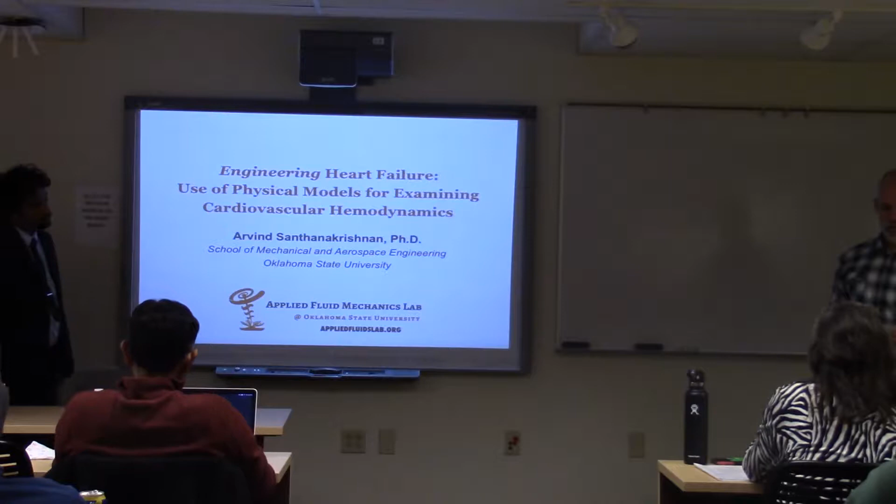So he's an assistant professor in the School of Mechanical and Aerospace Engineering at Oklahoma State University. He received his PhD in 2007 from the Department of Mechanical Engineering at the University of Kentucky. His doctoral research was focused on developing plasma actuators for flow control applications in micro-aerial vehicles.

He worked at the Carolina Center for Interdisciplinary Applied Mathematics at the University of North Carolina, Chapel Hill, as a postdoctoral fellow, investigating fluid structure interaction phenomena occurring in biological systems, including vortex formation in the developing vertebrate embryonic heart.

Following UNC, he pursued research in cardiovascular fluid mechanics at Georgia Tech, biomedical engineering. There, he simultaneously worked as the primary engineer in a collaborative research project between Georgia Tech and Children's Healthcare of Atlanta to design and develop a renal dialysis device for use in infants and children.

And currently, he directs the Applied Fluid Mechanics Lab at Oklahoma State University, conducting research in the areas of heart failure, flying and swimming of tiny insects, crustacean swimming, and pore water pumping by upside-down jellyfish.

So today, I don't think he's going to be talking about jellyfish or insects today, but he's going to focus on cardiovascular health. I'll put a little thing in the front.

Thank you. So I'm really glad that some of you guys showed up, either by choice or because you have to satisfy the seminar hours, but I'm glad you're here.

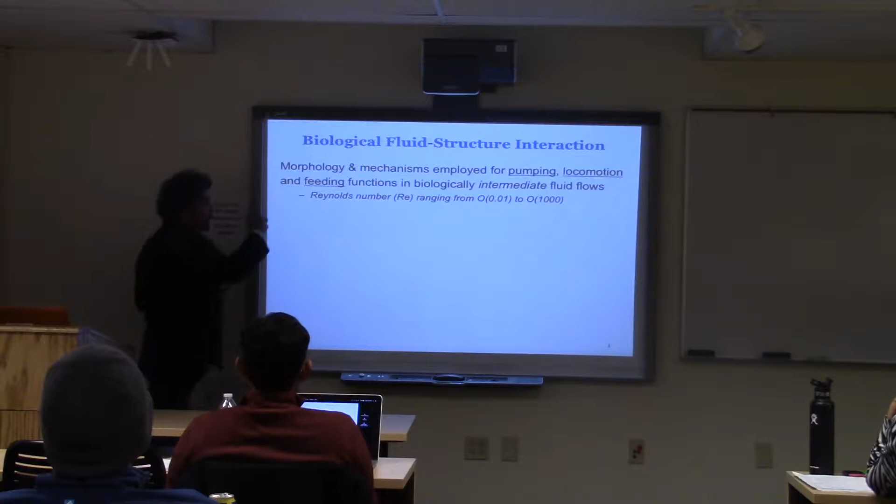So what I'm really interested in looking at is some sort of interaction between morphology, in other words, geometry and structure. How does it interact with mechanisms in which things move, whether it's for pumping blood in the case of your heart, whether it's for moving in air or water, whether it's a tiny bug, for example, or feeding, catching prey under the ocean.

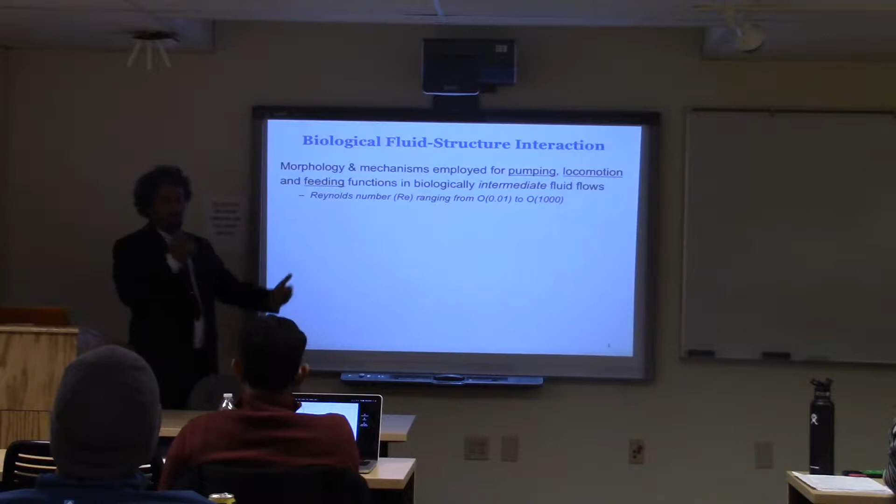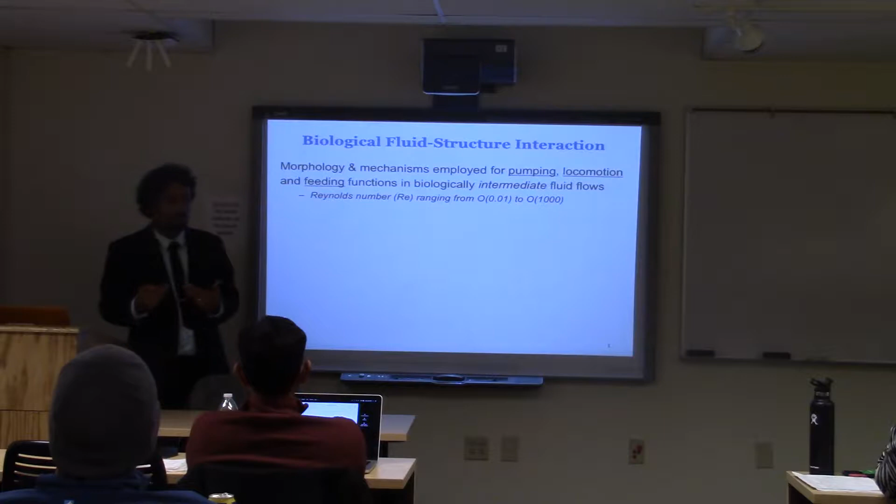In other words, are there physical design principles that govern that? So the idea is to use experimentation with models, organisms, and so forth to try and understand how the mechanism is engineered. And so the idea is that down the line, can we actually use this to develop devices, whether it's biomedical devices, heart valves, artificial pumps, and so on and so forth, to benefit engineering applications in medicine.

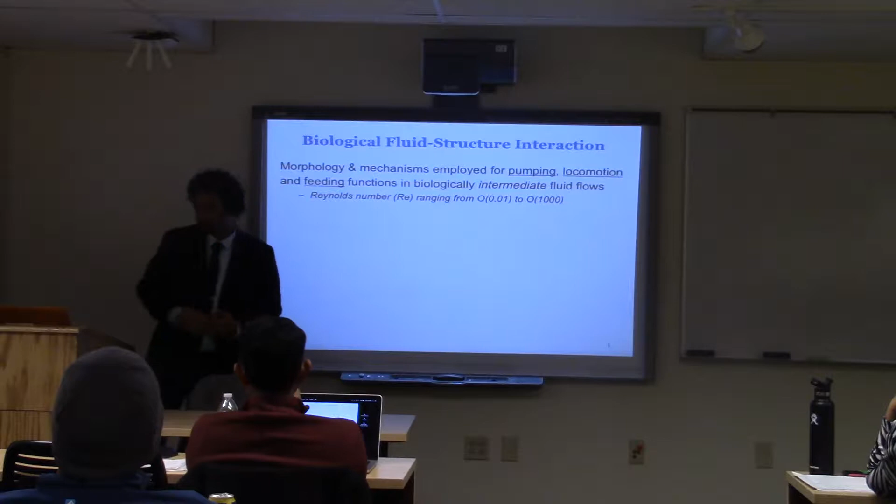And the common sort of theme is that Reynolds number is on the lower end, where I'm looking anywhere from 0.01 order of magnitude to about 1,000, so several orders of jump.

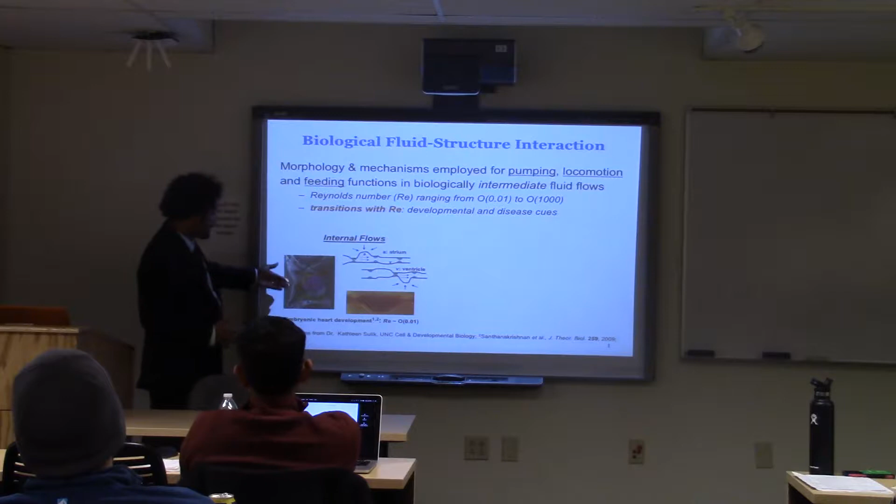So here's an example of how Reynolds number can actually change the developing heart. As the heart develops, in this case this is a mouse heart from an SEM image, and as the heart actually develops and forms these multiple chambers, atrium and ventricle, into the four-chambered heart that's inside our body, there's a whole series of morphological changes.

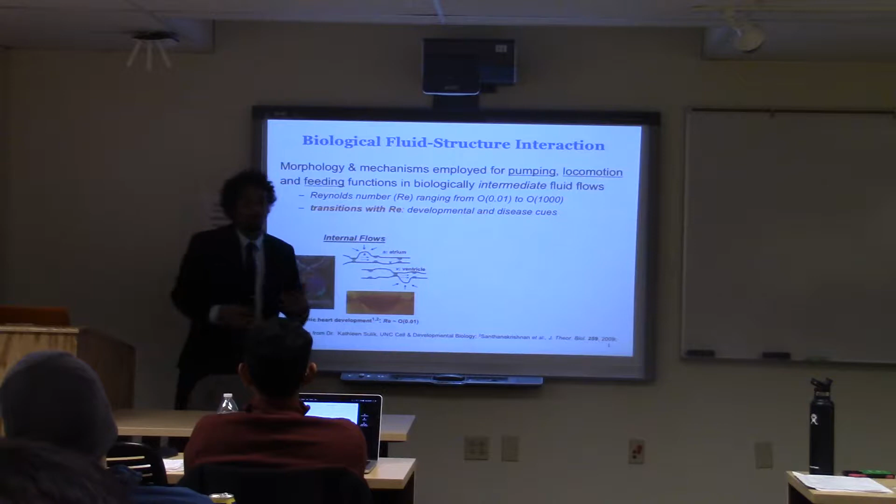With the morphological changes, there's actually a change in the blood flow patterns. There's vortices being created, and high shear regions present in the blood flow tract. And so these can actually influence the development itself. That's a very interesting way to think about it. The developing embryonic heart, the blood flow is not just helping to supply nutrients, but more importantly, it's helping to develop the heart itself.

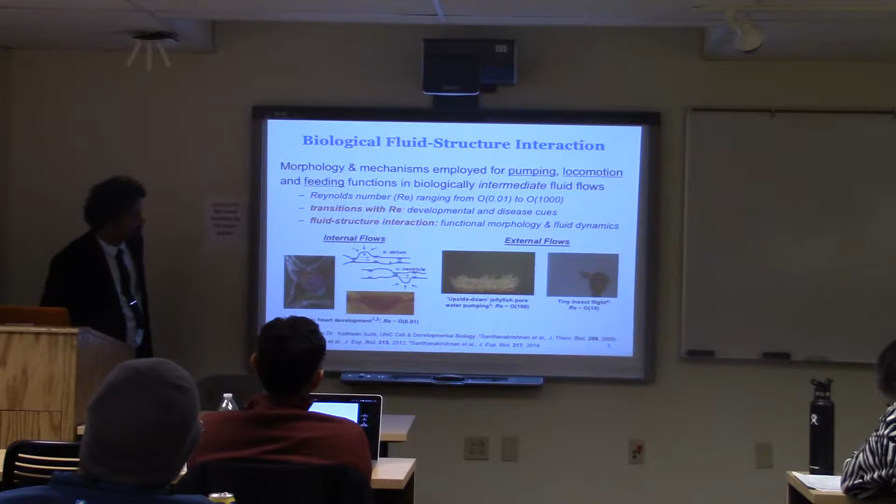And then in case of external flows, as opposed to these internal flows, I look at organisms where there's a large amount of undulation, so there's a structural motion that's actually quite drastic and noticeable, and there's flexibility, and all these little microscopic branches and so forth.

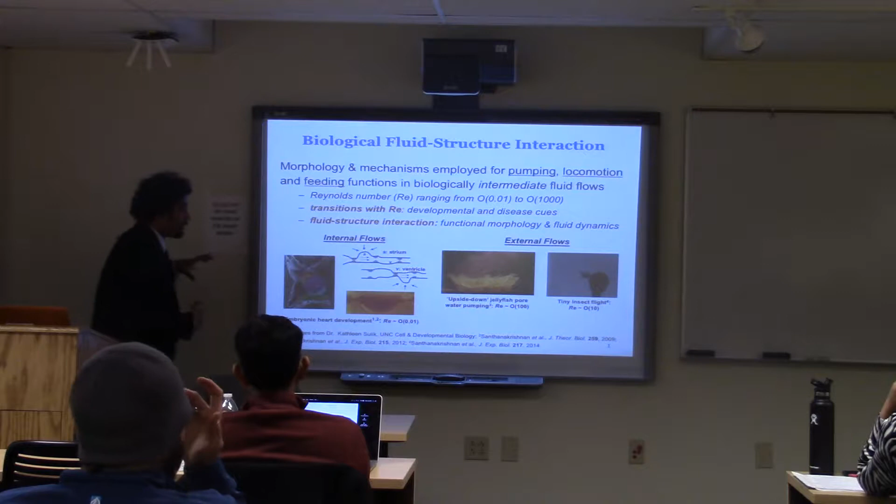And as you notice, as the dye is being injected, this is sand, these jellies actually pulse and they drive the jet upwards, and as a result, they're pumping stuff from the sand, taking it up, and creating some sort of diffusion and mixing in the water column. So what's really cool about this, to me as a fluid dynamicist by training, is that this is challenging because there's a whole lot of hierarchical structures here.

There's the big bell, there's the actual structure that's like a blocking mechanism, there's all these tiny little branches, and how do these interact in isolation, in collective organization, to create this net effect?

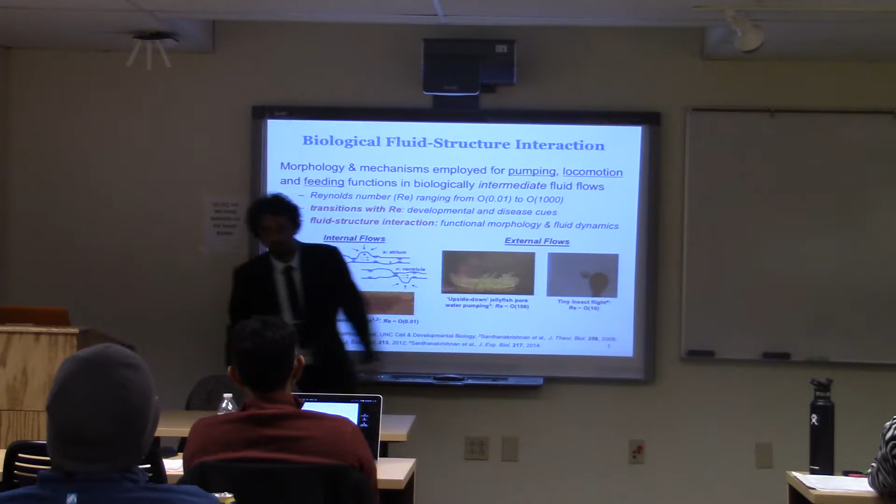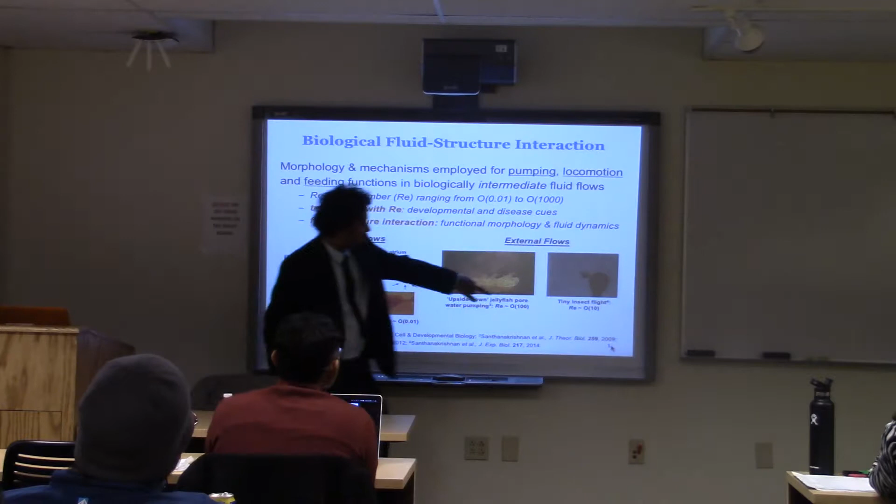The other thing I'm looking at is how these tiny insects interact. This insect is on the scale of a matchstick tip, about a quarter millimeter. They flap at about 200 times a second, the wing beat frequency. This was imaged with multiple high-speed cameras at 4,000 frames a second. There's not a whole lot of footage, so I'll use this shamelessly over and over in many talks, because it's hard to get.

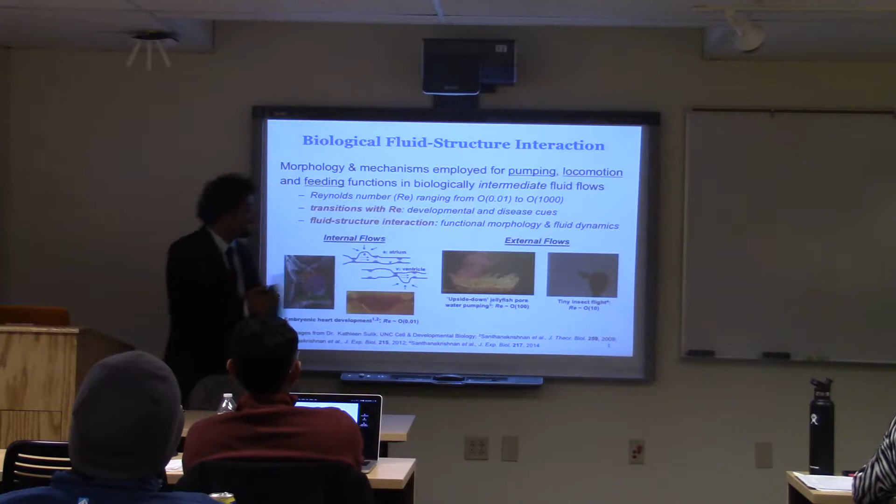But what's cool to me is that studying these can inform us, for example, how do I miniaturize something that flies? How do I make a device that filters water using some sort of unsteady mechanism? Typically, you think of filters as something you fit into your faucet, that's just kind of sitting there, not doing anything actively.

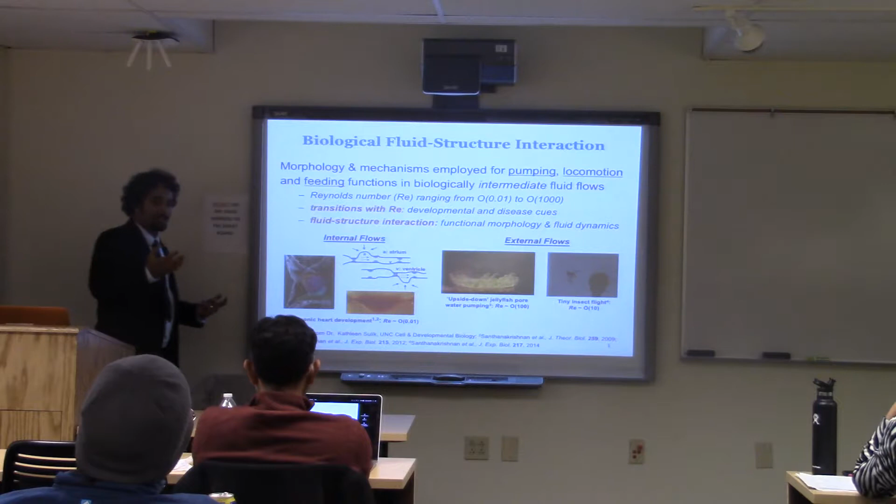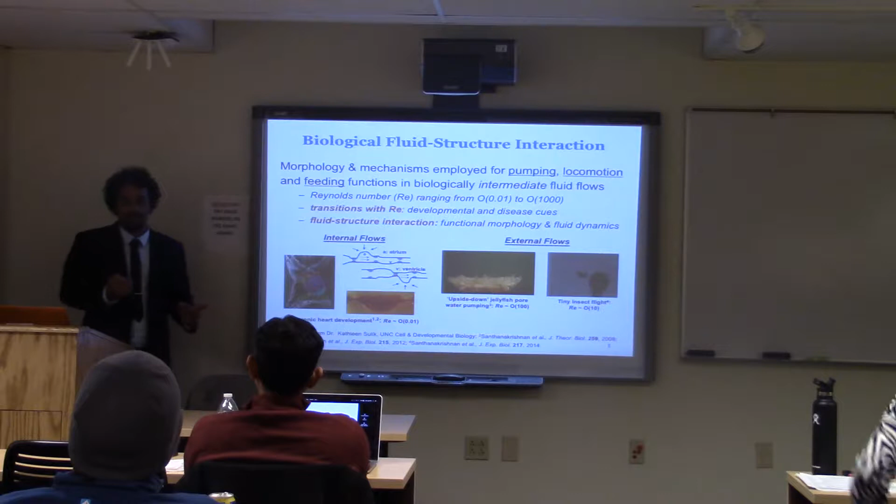One application could be from when I was doing my dialysis device. I had to use filters that basically make urine from blood, a set of straws used in little kids, and that wasn't efficient. So the idea is: can we make biomedical devices more adaptive to the scales by using ideas from nature's designs and applying them to engineering?

So, kind of a very sharp segue into cardiovascular flows, because that's going to be the focus of today's talk.

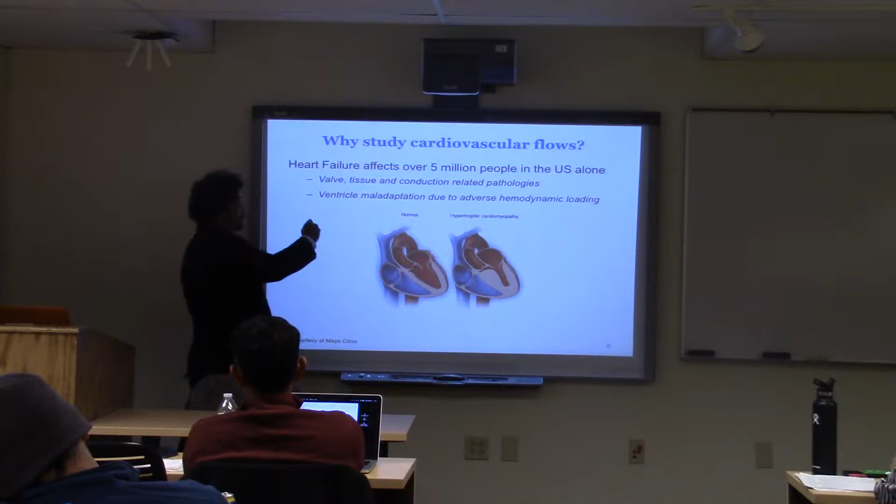Why study cardiovascular flows? Well, that's clearly of societal importance. Just in the US this year, there's more than 5 million people living with heart failure. And this is not just a singular condition, it's actually multiple roads that take you there.

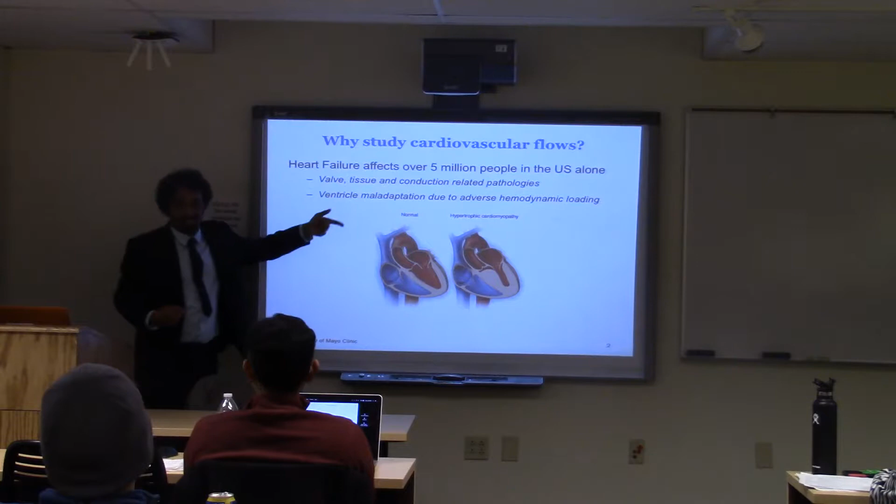It could be a result of valve incompetency or valve defects. It could be tissue—your heart tissue could be stiffer, there could be cells dying in it. It could also be part of the electrical circuit in your heart, so conduction related. There are many roads, but the outcome is that the patient's quality of life is impaired.

They're not able to walk down a set of stairs like you and I could so easily. So there's definitely applications to engineering new devices, and maybe trying to improve the diagnosis that cardiologists use, perhaps by adding more mathematics into understanding the blood flow.

What happens in many conditions—for example, this is a congenital heart defect present in about 1 in 500 people. Whether you know it or not, it's really a game of chance. A lot of people might know someone who died as a teenager, a very active athlete, from sudden cardiac death. Most of the time it's because of this, where the heart muscle just starts thickening.

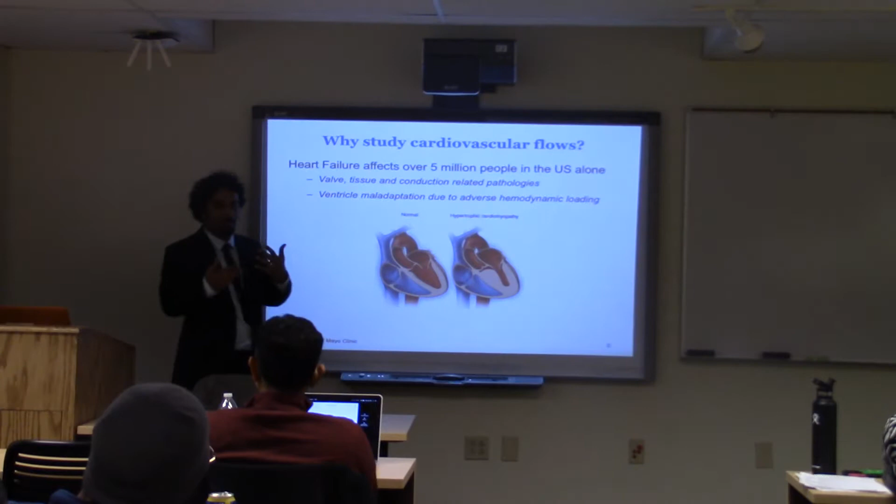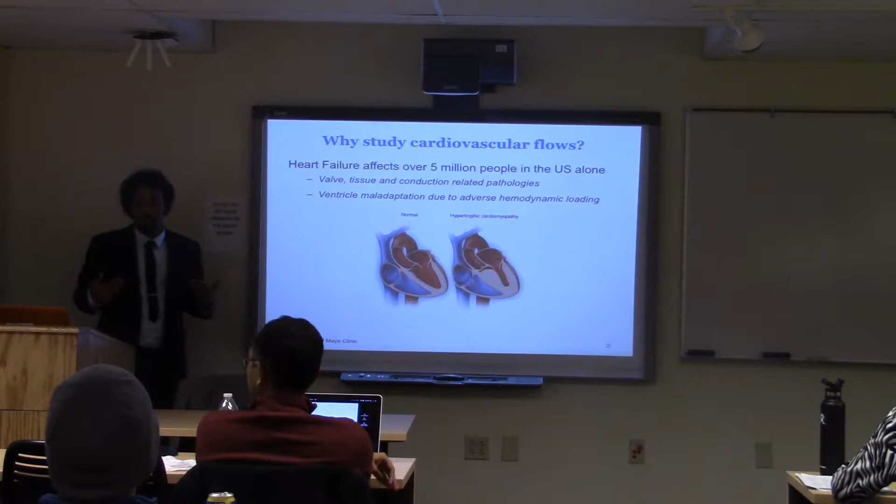What happens is the flow inside here and here—you can kind of physically appreciate visually, but it's not going to be the same, it's not going to look the same. Can we actually use this to diagnose the heart structure itself, so that we can maybe improve our therapeutic delivery earlier, for example? These are the questions we're interested in.

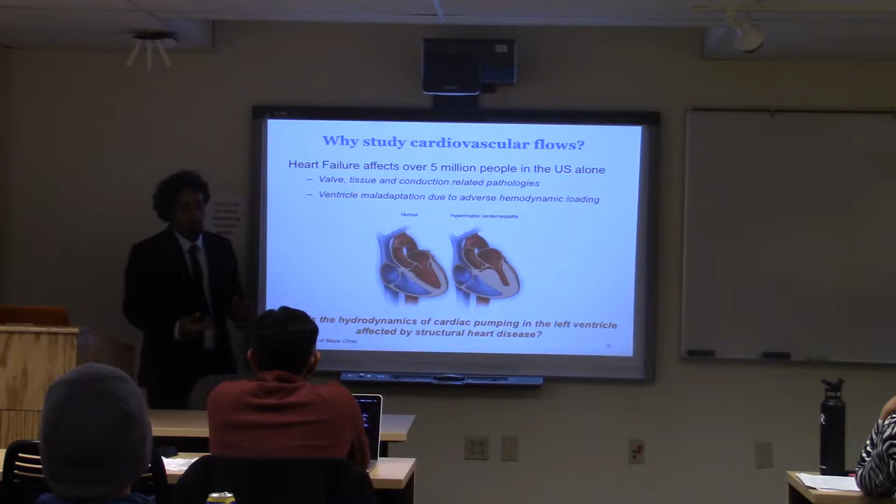And to me, circling back to the fluid mechanics question, the heart is nothing but a pump, right? That's really the heart of it. So how is the pumping affected when you have structural diseases? Structural heart diseases can lead to heart failure. How can we improve cardiology as we know it?

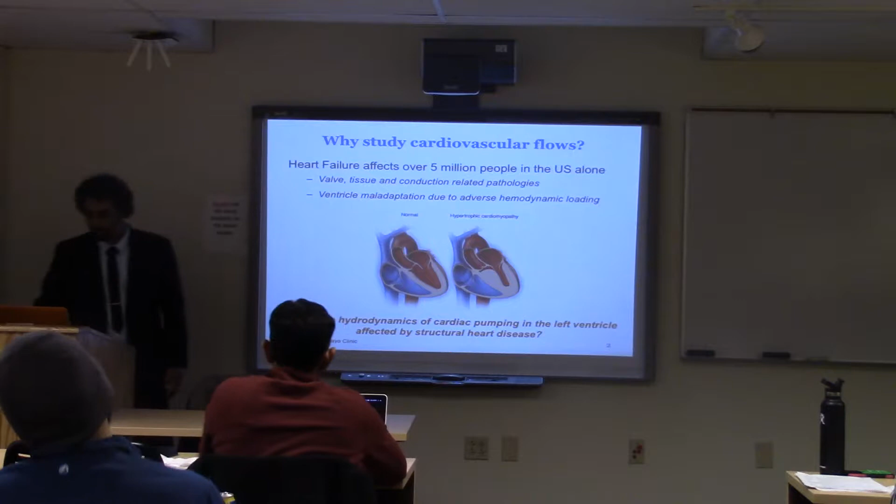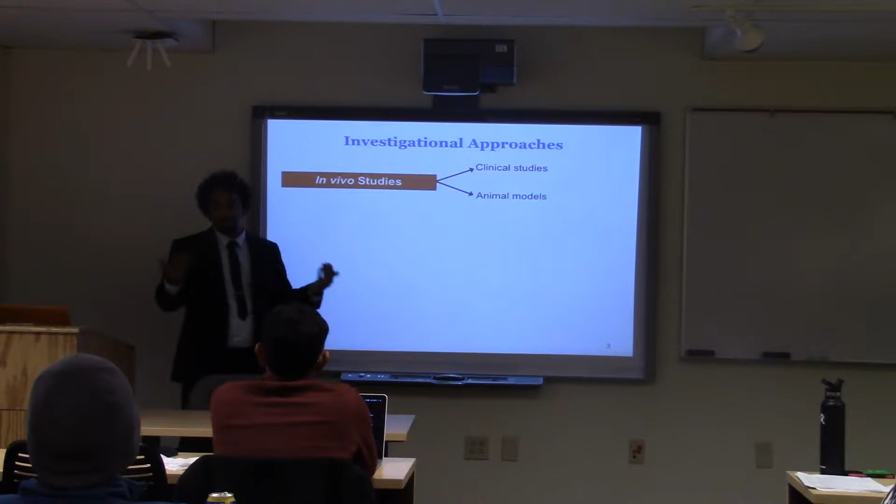Multiple different approaches exist. If you talk to a cardiologist, a practicing clinician, most of the time they look into the realm of in vivo studies, which can include clinical studies. They have some sort of protocol, recruit people with some inclusion criteria, do a whole lot of statistics, and try to recover statistical correlations. Does that really give you an idea of the mechanism behind it? Probably not, more so.

The other option is to go to animal models, which if you talk to the people in VetMed here, they'll probably be doing this as we speak. Again, both of these approaches are stifled and challenged by the fact that you cannot choose your disease and control it.

To me, as an engineer, I'd like to be able to control. I want to have knobs in everything that I do so I can move those knobs, make the system do what I want. It's a more deliberate type of investigation that I like.

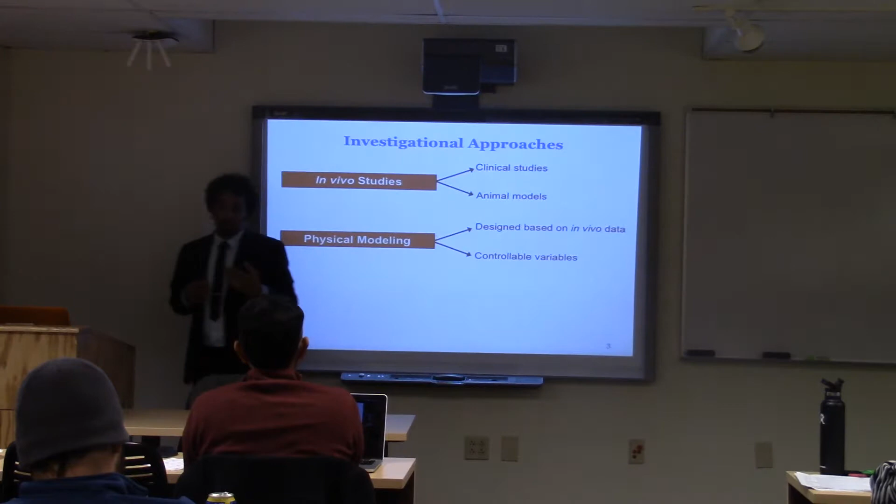So the next approach, which is more intuitive and common to engineers, is physical modeling. In this case, you try to make something that's not real, but artificial, but you try to put something similar to the real system in there. So maybe you move it the same way, maybe you have similar materials that you use, and there's some sort of guiding data that helps you design it. Maybe it's imaging obtained from patients, maybe it's imaging obtained from animals, but you use that to design your models.

And then the best part about it is, given a carefully designed physical model setup, you can actually control different variables. You can investigate more of a causative relationship - here's the cause, is there an effect? One by one, and try to isolate it. There's much more controllability to it.

Down the line, does physical modeling really help in terms of a clinician trying to do a surgery tomorrow? What would he or she need? What would be ideal is to maybe just put it in a computer model. Take the MRI data or CT data or ultrasound data, put it in a computer model. It takes its time, spits out the outcomes, and then you make a good judgment on it.

Given that computational models force some sort of mathematics into a biological problem, they also should, goes without saying, be designed based on some sort of guiding live imaging data. And they should also be able to accommodate the complex interactions. Physical models maybe can skip some of that for the sake of trying to get at certain variables. Computational models, before they can go and feed into patient therapies, we need to accommodate a whole lot more. In other words, we actually need validation of that.

So physical modeling can actually serve the purpose of providing validation data to computational models. There's a back-and-forth crosstalk: physical models provide data to validate computational models, and computational models can in turn say, I really need more complexity in something, can you do more experiments and give me more data? So there's a healthy exchange of back-and-forth interactions that help develop a more solid, validated, clinically relevant computational model that hopefully somebody can use at the bench, at the bedside.

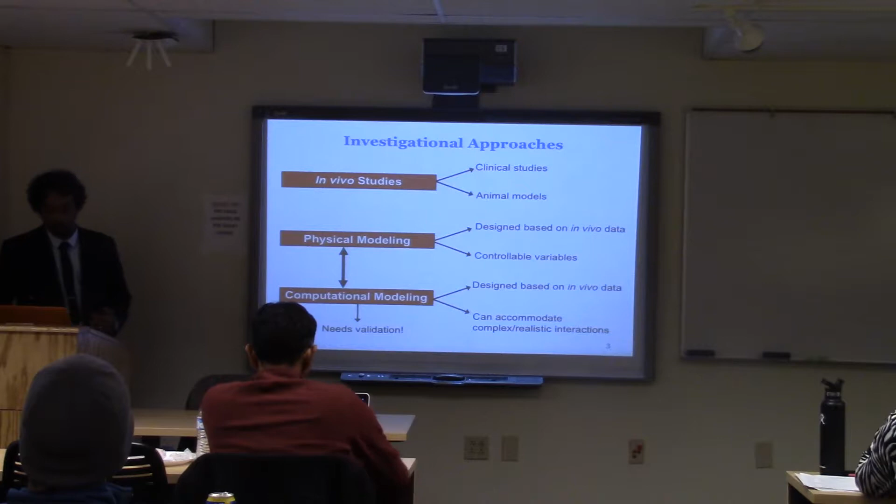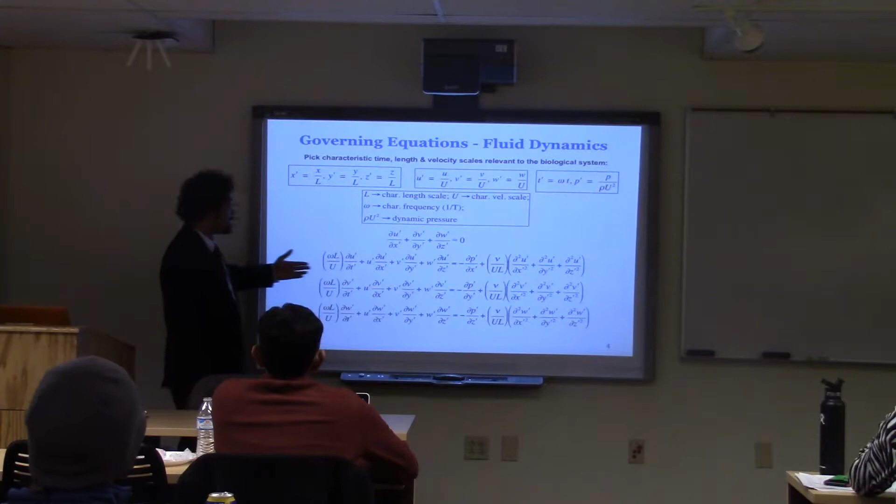Just to quickly cover this for those not looking at fluid dynamics - the main idea I'm trying to drive here is that these are the governing, non-dimensional governing equations of fluid flow, the Navier-Stokes equations. If I just look at one dimension, the momentum equation, you get this Reynolds number factor, and it's essentially nothing but the ratio of inertial and viscous forces. So matching Reynolds number between two systems essentially ensures that the forces experienced by one system and another are similar. That gives you a roadmap to building models that hopefully will be close enough to represent the actual organismal life system.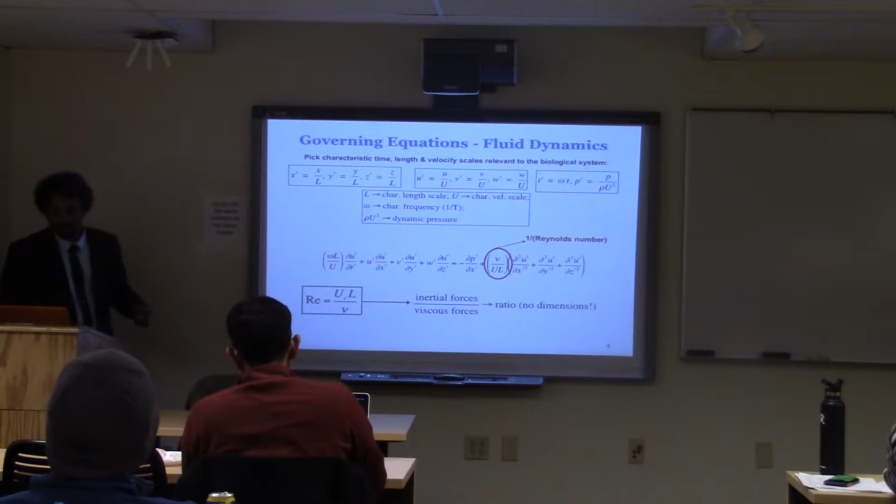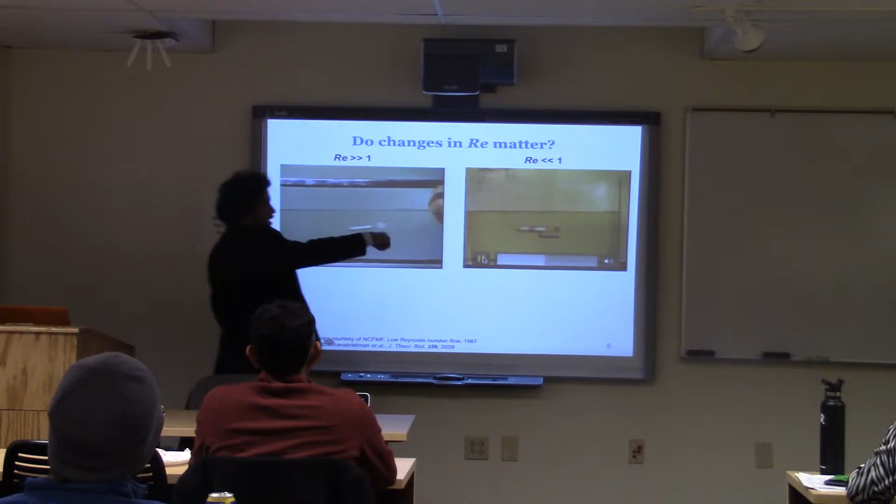What do you think will happen here? This is corn syrup. So do you think it'll move? Let's just say if it doesn't move, they get a piece of candy, right? So it's not going to move. Okay, that's a pretty drastic difference between the two. So changes in Reynolds number actually do matter.

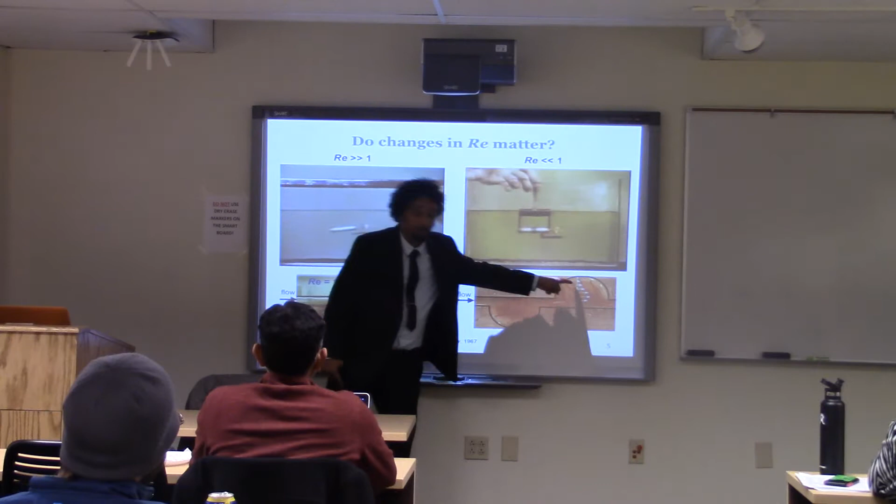In the case of internal flows, for example, they can change your behavior from high shear, vortices, and stuff like that to more of a parabolic profile and so forth. Changes in Reynolds number occur because of development, because an organism is growing, the heart is growing from small to big. It can also occur because of changes due to disease, because some heart muscles have contracted, maybe the length scale is smaller, and so on.

So changes in Reynolds number do matter. And what's interesting, for those who want to make their career, there are graduate students here studying fluid mechanics in physiology. There's a lot of problems out there. This is intentionally to advertise and market my area of interest.

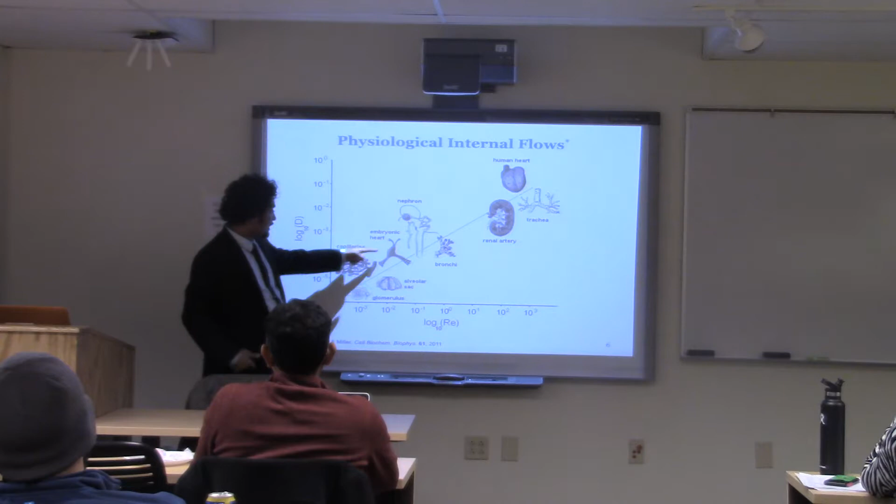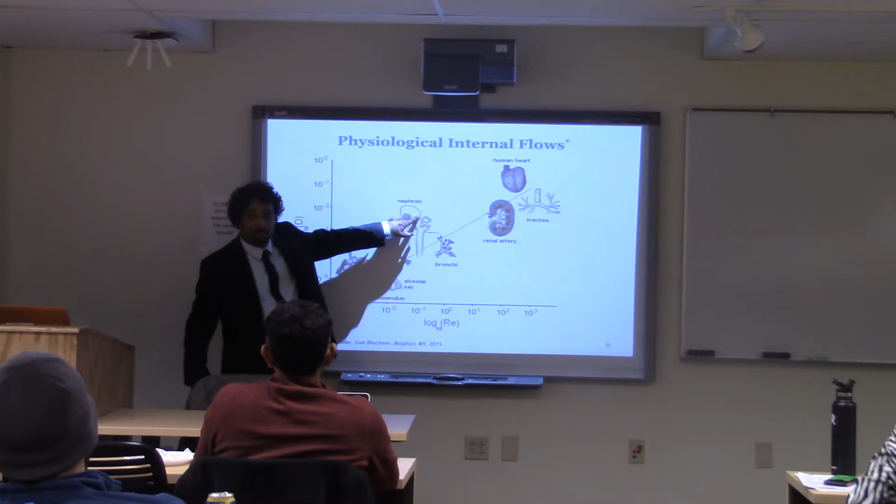If you look at a heart alone, the embryonic heart starts over here, this is a log scale, and goes all the way there, with all these stages in between. If you take a look at your kidneys, the glomerulus is over here, the nephron's over there. Many organs in your body operate across a varying range of Reynolds numbers.

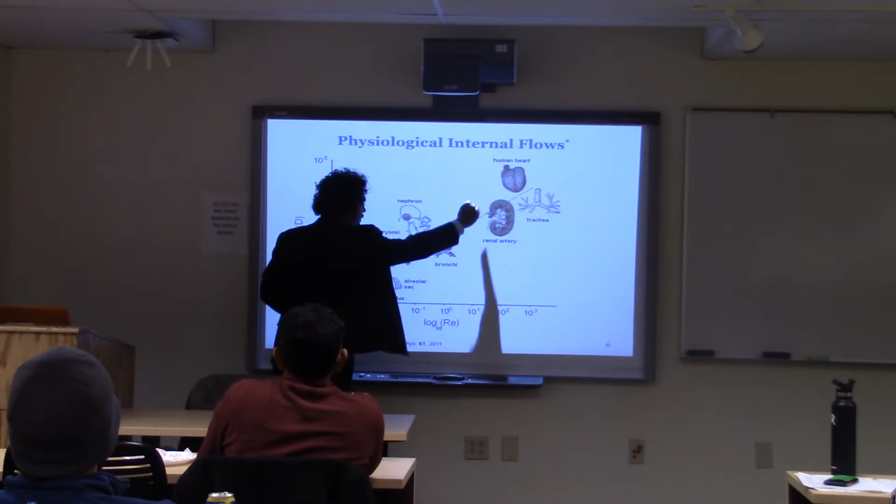So what does that mean is that at every single little jump that you're making, the fluid mechanics can be quite different. And that's kind of the take-home message: how do we study this, and how do we use that to inform healthcare, for example? That's the big picture.

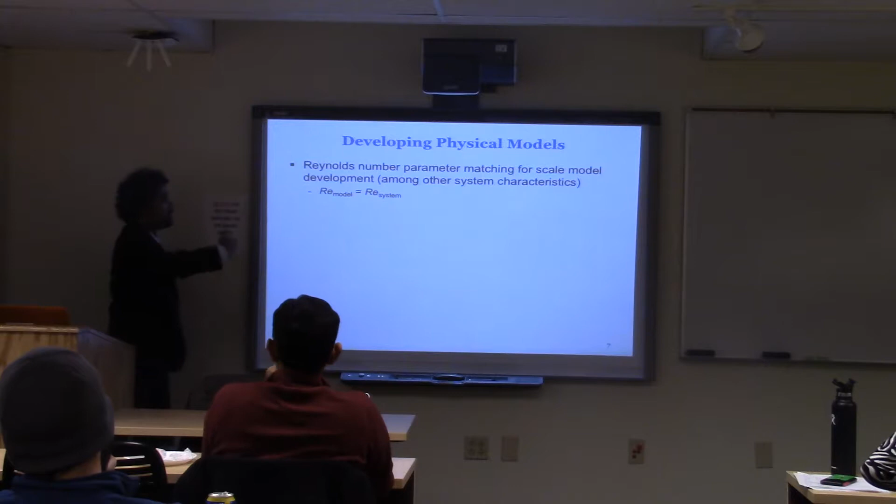In terms of developing physical models, I just wanted to make a couple of notes. Typically what we're doing in terms of dynamic matching between one system and another, whether it's the real organism or the model, is trying to match the Reynolds numbers, so the ratios of forces acting will be the same. The usefulness is that you can control different variables in an isolated sense, but many times mechanical measurements may not be possible to acquire in vivo.

So if you wanted to measure the stiffness, the material property of the myocardium in a developing embryonic heart, it's going to be really, really difficult. The size scales are challenging, the motion's pretty wild. How are you going to put a probe in there? And do you even have a probe that can do this?

So a lot of times you're challenged by the fact that there isn't an instrument that will give you the answer you need. Does that mean we should avoid the problem? Maybe not—the problem is still important. Can we think of alternative approaches based on physical modeling or computational modeling to get to understanding what's important?

And it's possibly less expensive—depending on the type of in vivo model you're using, it can be a lot less expensive. So it's one way to get your science started on the right footing, and then hopefully you can do more in the way of modeling approaches and live experiments also.

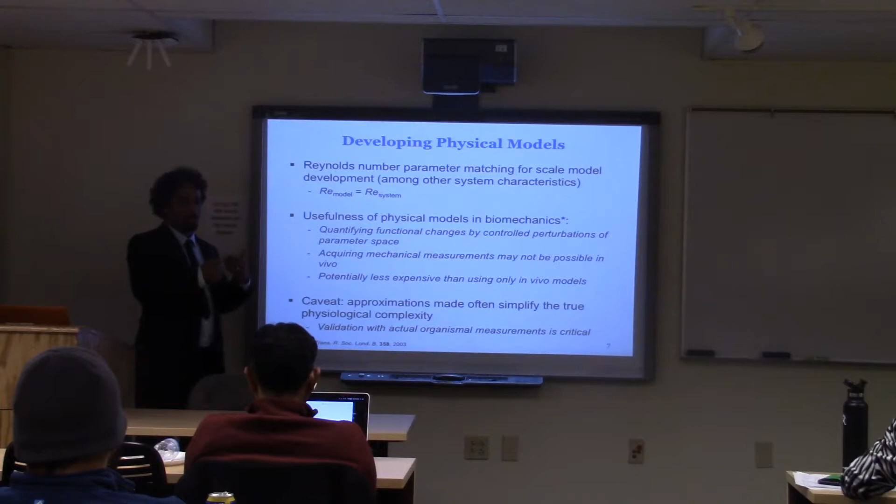The important thing to note is that these physical models don't necessarily give you the truth. They give you something close to the truth, but you have to validate this with measurements wherever possible. If it's not possible, then maybe you're challenged by that. But if it is possible, you need to validate it and confirm that your model is matching the physiological conditions.

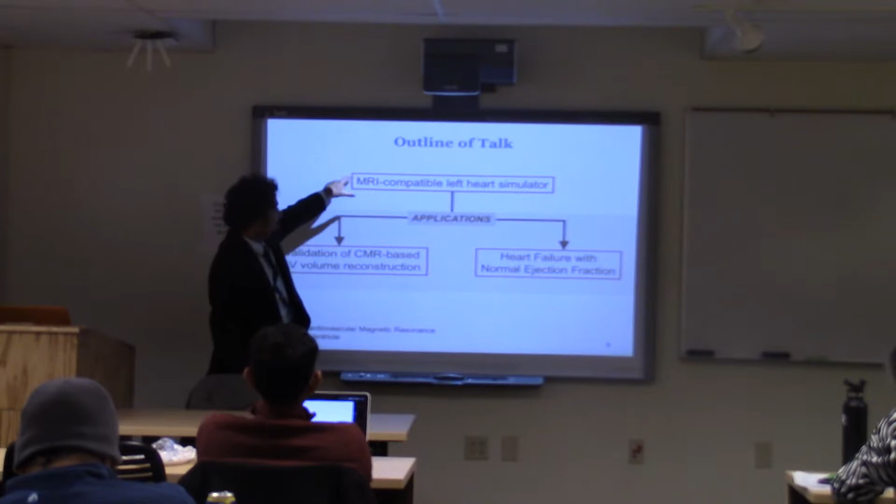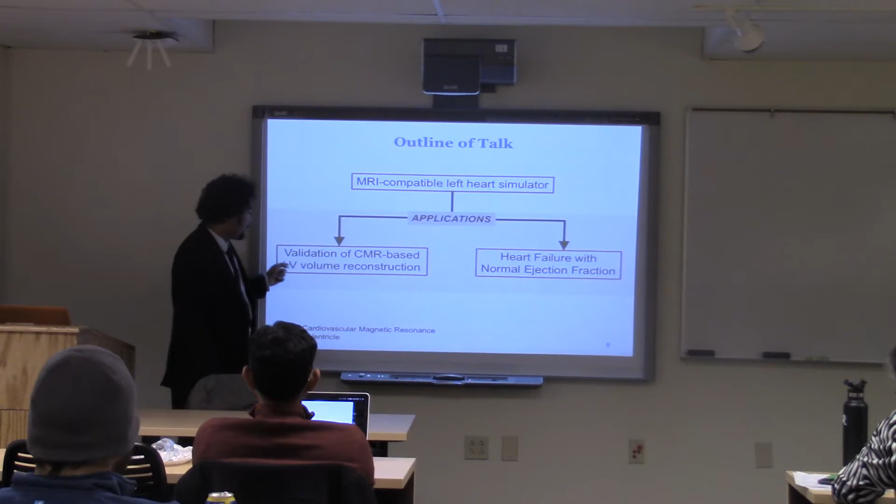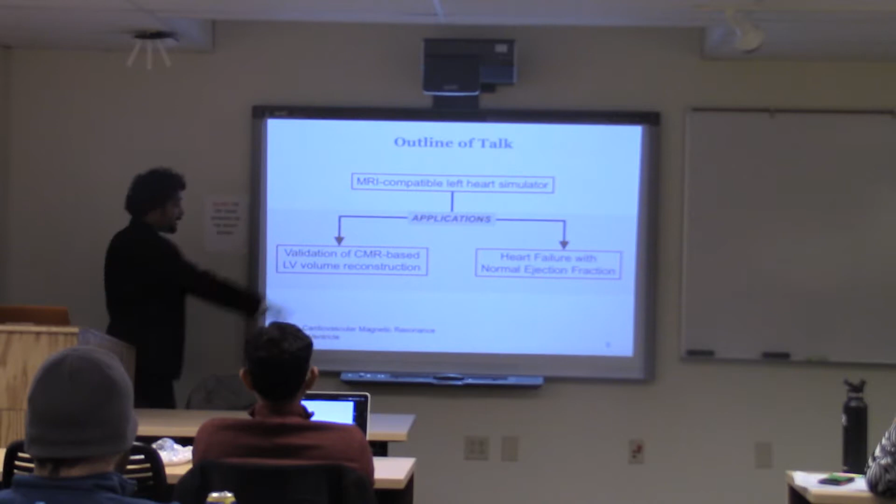So today what I'm going to include in the talk is the development of an MRI-compatible left heart phantom, a left heart simulator. Then I want to show a couple of applications of this facility. One is validation of cardiovascular magnetic resonance-based reconstruction of the left heart, left ventricle volume. The other is looking at a possible way to diagnose stiffening of the heart in a particular type of heart failure. So the first thing I'm going to start with is development of the facility.

This was in collaboration with my former postdoc advisor and another collaborator from Emory University Radiology, who is an expert in MRI, so he was able to help us with that. The motivation is that, again, a lot of in vitro models exist. So what I'm showing here is not unique—there are plenty of people that do the same thing. This is not the world's first facility or anything like that.

What's typically a problem with a lot of these models is that they do a good job giving you really good data right here on the bench. But what does it mean when it goes to a cardiologist's tools and equipment? Not much, because a lot of times your methods could give you data at a very high resolution, or spectacular high-speed data with great slow motion, but the cardiologist doesn't have access to that.

For example, a patient doesn't want to be stuck in a claustrophobic MRI bore for a long time just because you want high-resolution data. Not practical, okay? So does that mean such models are not important?

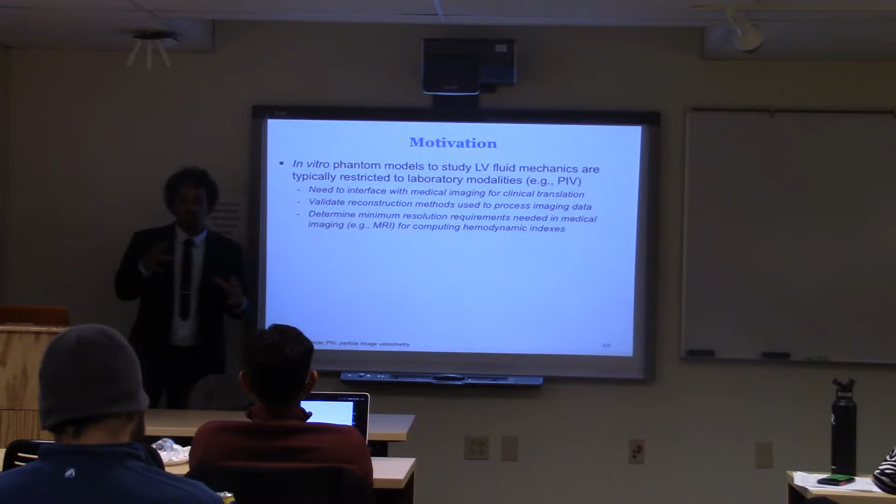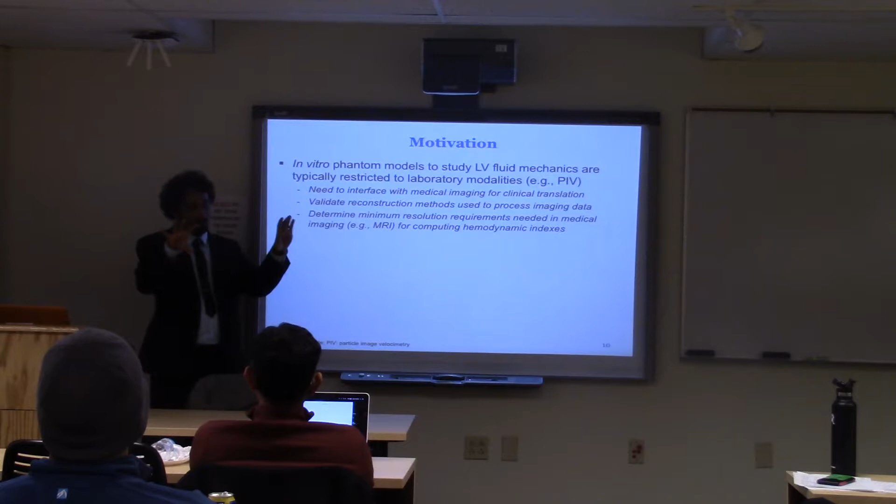Probably not, because to translate something that an MRI machine can measure, you need to ask: how accurate is this? Is this truly what the metric is supposed to mean? In other words, can I have a comparable measurement from another technique to juxtapose, put side by side with, and see whether they match up? It's a very simple engineering question.

You get a new type of measurement characteristic, an index from one measurement technique. You ask, is this really it? Is this the true value? And how do you test it? You look at another method that will give you something similar, hopefully higher in resolution, and put them side by side, and say, look, it's very close by X%, right?

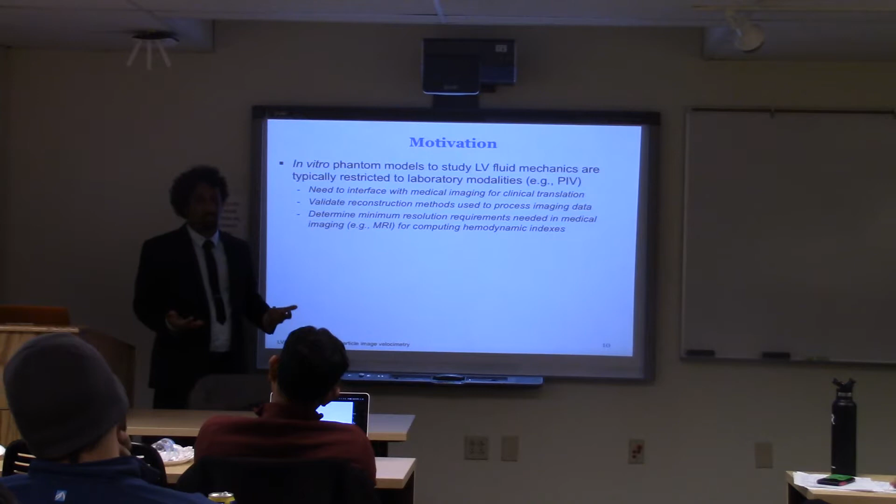The other thing is that a lot of times, to calculate something from imaging data, the radiology people and the clinician, the cardiology folks don't know what type of resolution they need. A lot of times it's kind of a practice. So they say, look, we're going to do this many slices of the MRI of the heart, at this many images per cycle, and so forth. But it's based on practice, not necessarily based on any sense of accuracy.

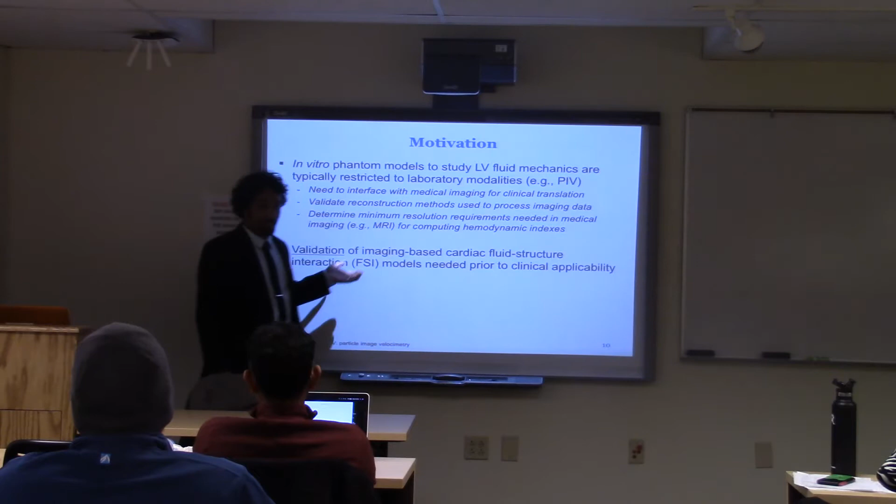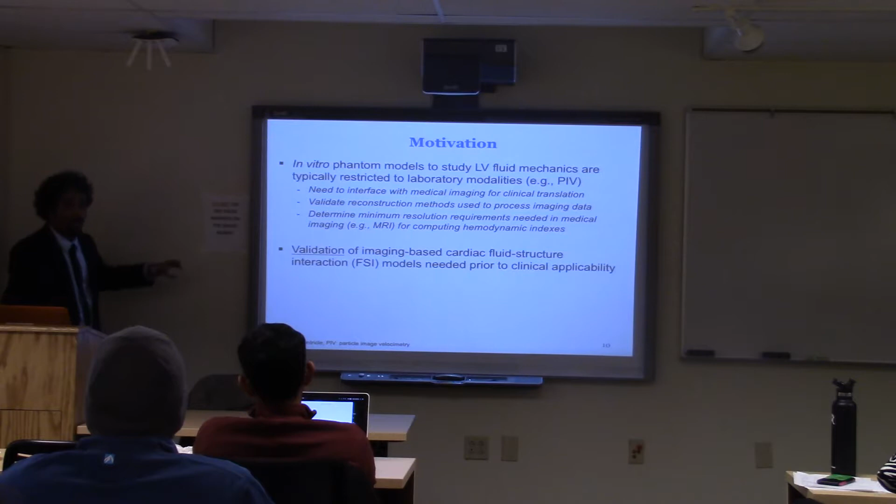If we are going to move to imaging-based modeling, so I can predict therapy's outcomes beforehand, then we need validation of those. The phantom models can provide a link between the bench and the bedside, providing data from multiple methods so you can test how accurate it is from the medical imaging side. You can also tell, if you want to improve the accuracy, how much resolution you need on the scan.

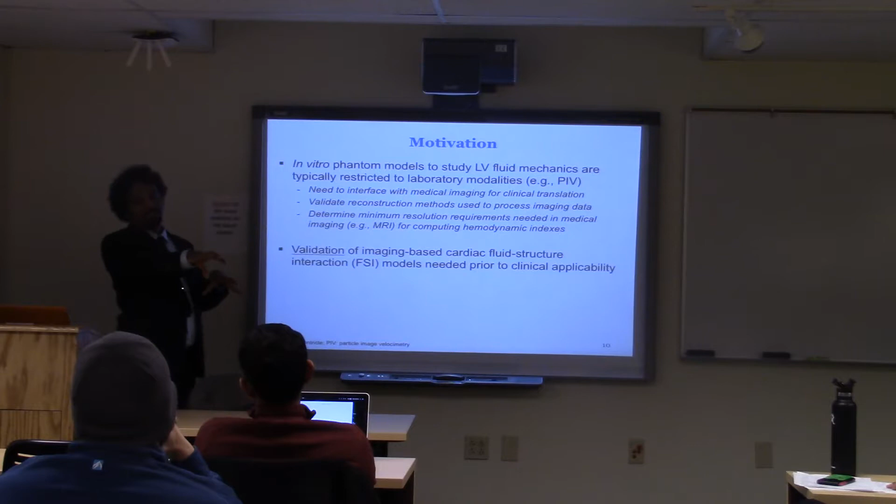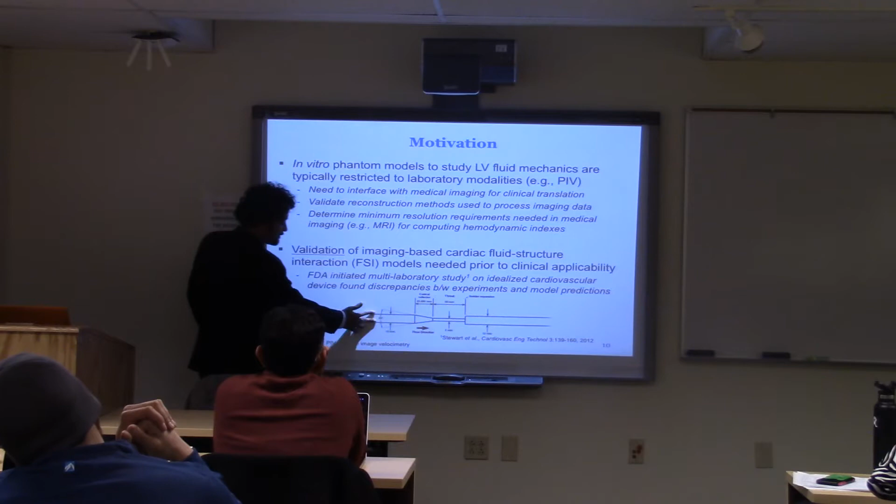For example, this situation is pretty serious. This is an idealized cardiovascular device that the FDA gave to a bunch of labs around the country, research labs like many of the ones here on campus, and what they wanted to do is simulate flow going through this. The main thing you'll notice is the geometry is changing: there's a contraction, an expansion, some sharp corners, all of that.

Surprisingly, the computational models presented quite a bit of discrepancy with lab measurements. They didn't match, especially when it came to shear stress at the walls, and so forth. The conclusion of this study is that we need more rigorous validation before we can use a computational model to tell whether a patient's going to succeed or not from a therapy. A model is just that—it needs to have some validation.

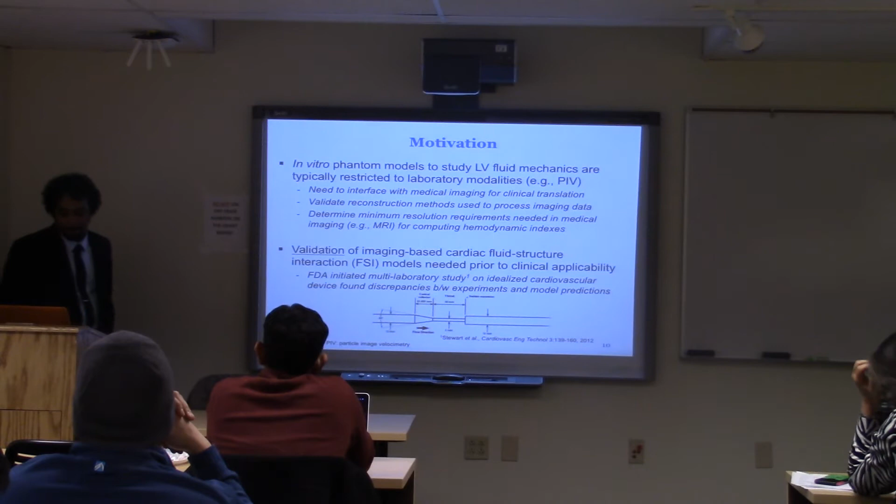So in terms of the left heart, what we started out doing was take volunteer data. We put innocent undergrads and graduate students like yourself, and postdocs like me hungry for papers, enticing them with the possibility of getting a free heart scan. We put them in the MRI machine and got all this medical data. We had a repository of this at Georgia Tech, where I was at the time.

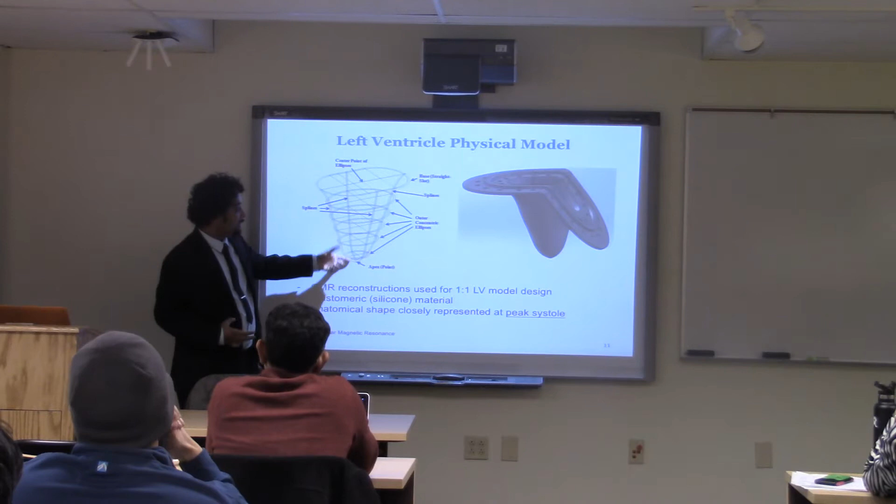What we started doing was segmenting the endocardial, the innermost tissue, that border, and fitting ellipses around it. Then using SolidWorks, you can try to fit these in a concentric manner and generate a geometry close to the anatomical representation of your left ventricle. What we did was make a mold and cast flexible walled physical models using silicone material. The anatomical shape is represented closely at one particular phase of your heart, peak systole, the peak of the pumping state of the heart.

Then what we did was my favorite thing: gather a bunch of PVC pipes, nuts, bolts, hose clamps, and put it into a flow circuit. This flow circuit is nowhere close to the complexity of your real organ, right? But here's what it does: you have a programmable piston pump that goes back and forth. This whole thing is filled with water glycerin in a box, and inside the box is this artificial heart.

As this is pushing and pulling, the vacuum or positive pressure creates suction and pumping. So we have prosthetic heart valves that create flow only one way, similar to your natural heart valves, preventing flow from going the wrong way.

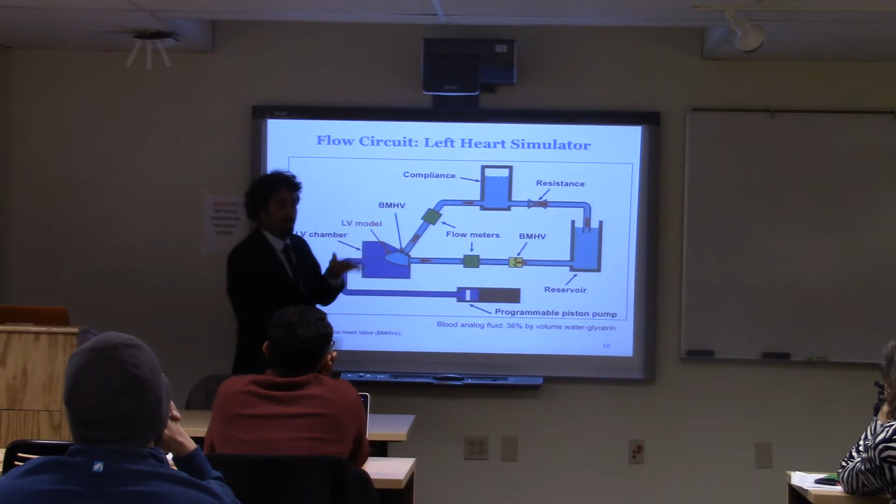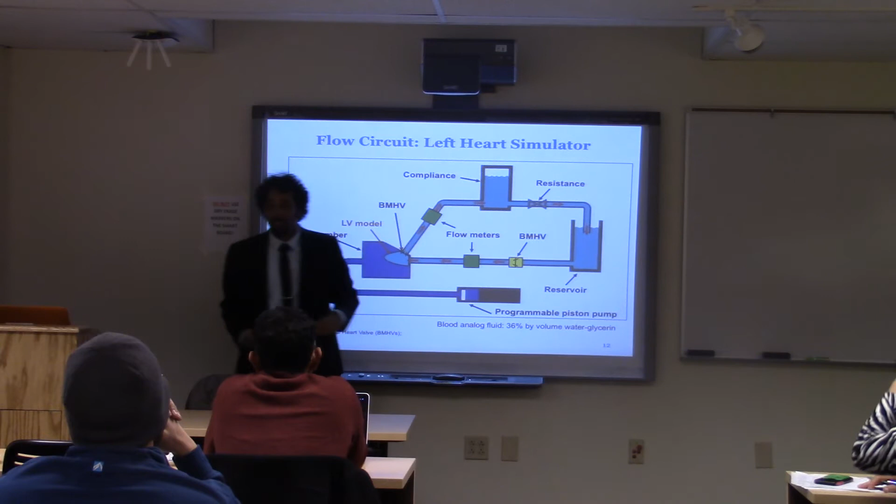To simulate elasticity in blood vessels, we have a lumped compliance chamber, very similar to a shock absorber. Part of it is air, part is incompressible water-glycerin fluid. Depending on the air ratio, you can create fluctuations in system pressure. And then we have a resistance that's basically like a choke, controlling how much flow goes in and out of the system, so it can regulate how much blood, in quotes, your heart's putting out—cardiac output.

What happens if your heart is stiff? Does it create a problem? What if it's three times stiffer? What if it's two times stiffer? When is it going to be a problem? How is it going to be a problem?

The hemodynamics we get, the blood flow patterns, resemble what we're supposed to have in normal humans. Normal humans fill their heart in two distinct portions: one where the ventricle actively suctions and relaxes and accepts blood—that's the early relaxation or E wave. Then there's a period of almost quiet, nothing going on. Then the left atrium does a little pulse, giving an atrial kick. We've been able to recover that in our simulation.

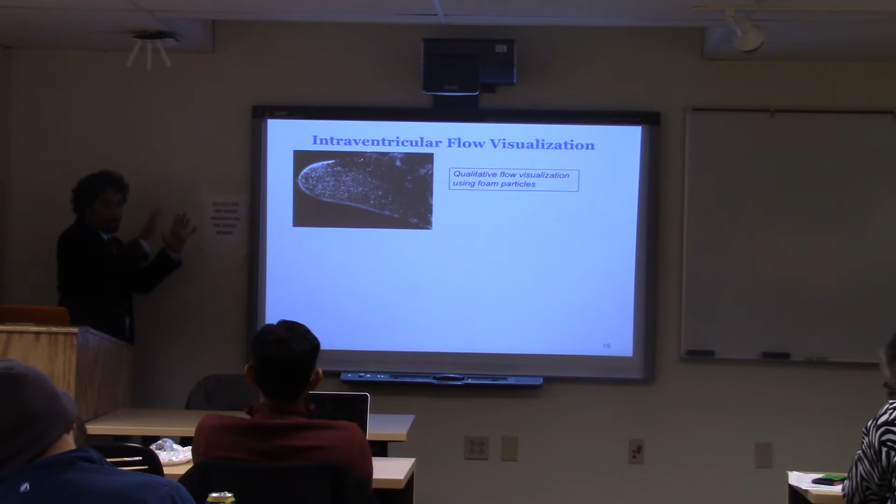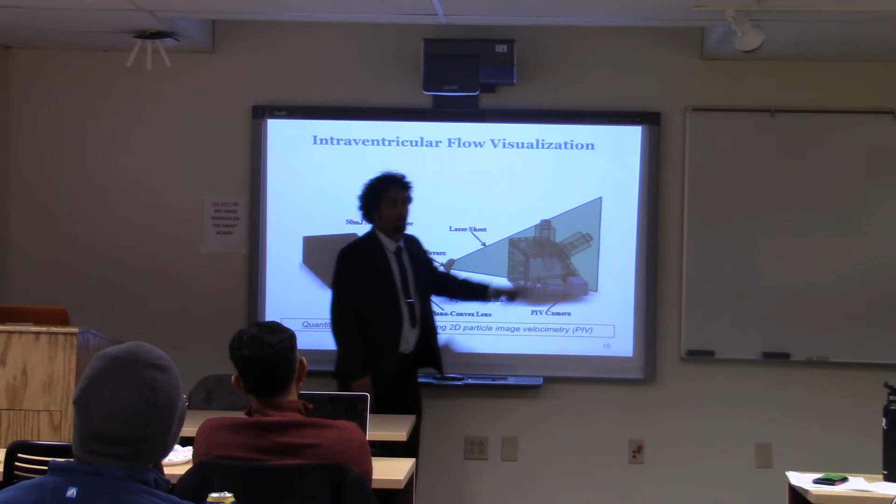The aortic pressure we can recover to normal values, 120 over 80 millimeters of mercury. So we're able to get bulk blood flow patterns to be similar. And since it's transparent and optically accessible, we can do qualitative particle flow visualization, or particle image velocimetry, PIV, where we use a powerful laser beam converted into a sheet that cuts through a piece of the heart model, and cameras look at how little tracer particles inside are moving. Eventually we can get quantitative velocity maps on the entire heart from that.

The goal of our experiment was to take MRI measurements on this. It was made with brass, non-ferromagnetic materials, so we could put it in an MR scanner. Going to the scanner and testing whether it was MRI compatible was one of the scariest days of my life, because before I went in, they told me the price tag on this equipment was pretty serious. And I said, oh, okay.

There was a little part that created some interference. Luckily, it didn't hit and break anything. We just got lucky there.

What we wanted to do: MRI typically in patients is very high resolution in space. We get beautiful, high spatially resolved images, but time resolution is usually not so great—usually about 20 different pictures for one heartbeat. Depending on the type of heart motion and disorder you have, that may or may not be enough to reconstruct an accurate representation of what your heart is doing.

So what we decided to do was put markers on the wall of the heart and do stereo imaging with high-speed cameras at a high frame rate, to be able to reconstruct the motion from that.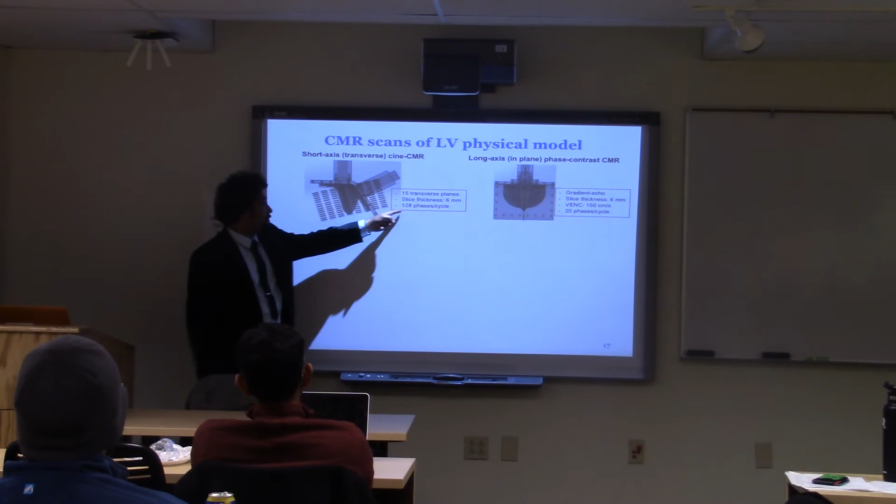We wanted to start by seeing when it's going to match. This is pretty much as good as we could get without sacrificing the spatial resolution.

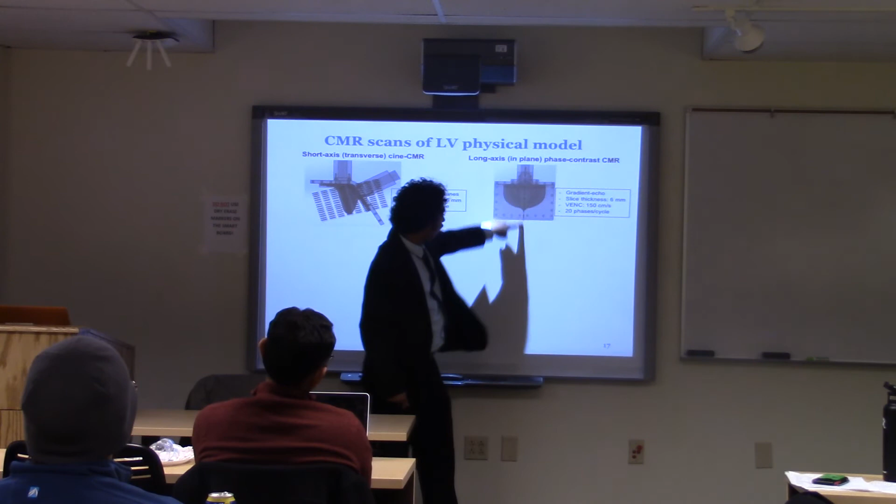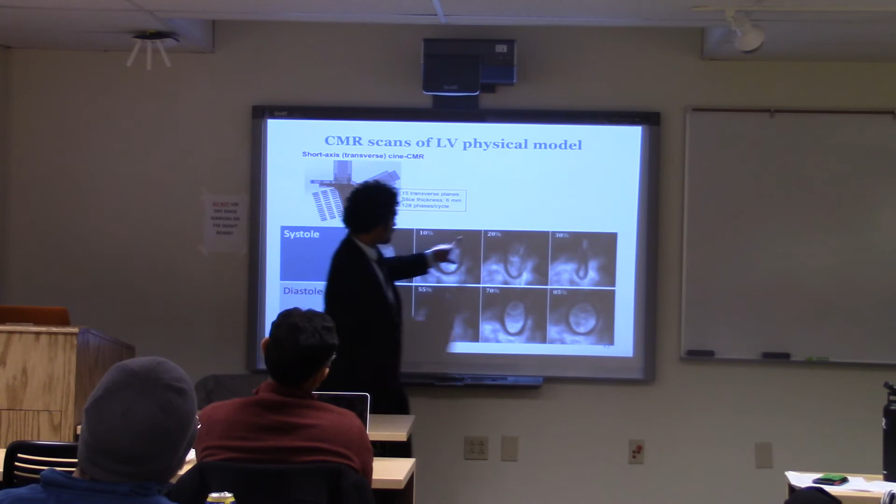We also did flow using MRI, a phase contrast sequence, where we looked at a central plane and did PIV on the same plane. Here are different pictures of the MRI, showing the border of the wall moving at different parts of the cardiac cycle.

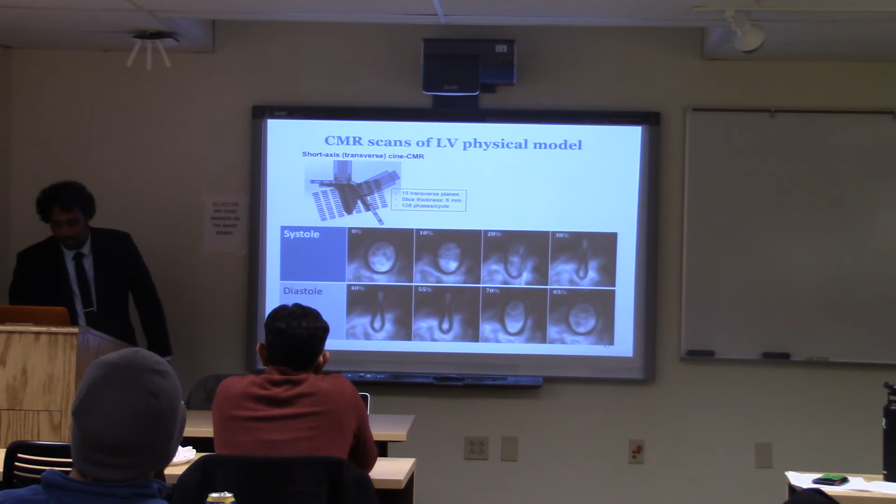Different systole for pumping, diastole for filling. So now we used MATLAB algorithms to track this border to get the volume of the heart over time.

Meanwhile, in stereophotogrammetry, we took these two images and used a MATLAB code that does direct linear transformation in very small localized areas, and then we constructed how those points on the heart are moving in time.

We then mirrored it across the center line. We assumed it's center-line symmetric, but it's mostly true with our physical model.

Here's a representation of one particular time instance of the point cloud. The MRI, if you remember, gives you volume by tracking the borders, and I can do the same thing here. The internal volume can be calculated, and now I can put them both side by side and see how good they are.

The first thing we did was calculate LV, left ventricular volume, and compared it between stereophotogrammetry and the flow probes. There are two flow probes we used that we couldn't put in the MRI machine. They gather flow rates, volume per unit time, at more than a kilohertz, so very high resolution data.

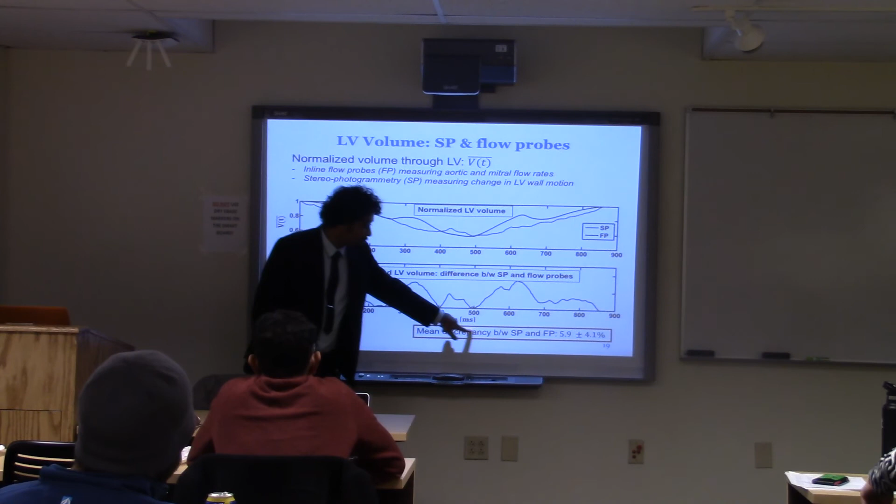We put them both together and looked at them side by side, quantifying the difference in volume between stereophotogrammetry and flow probes. It turns out the average discrepancy was about 5.9%, give or take. So that's where we're at in terms of how good our stereophotogrammetry reconstruction is.

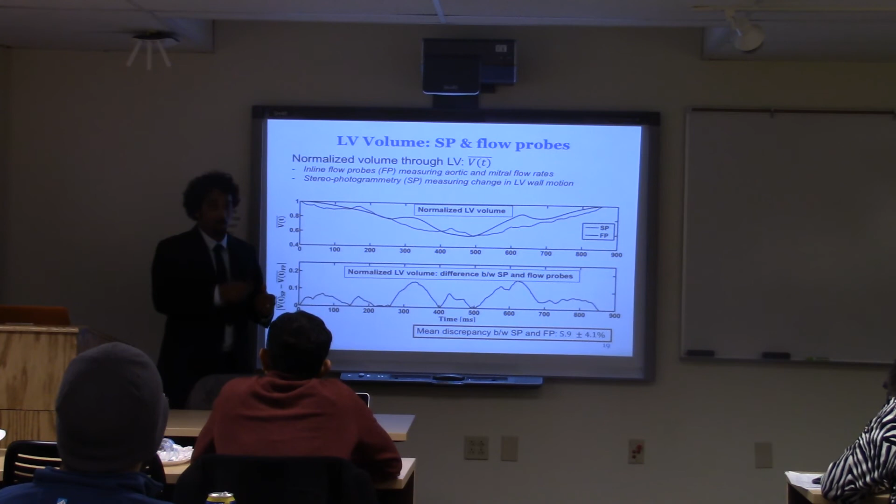Can this be improved? Perhaps. How? Maybe I can record more images, or I can only do pieces of the heart, just little segments instead of imaging the whole heart. That's more time consuming, but maybe I can lower this number down. This is where we're at right now.

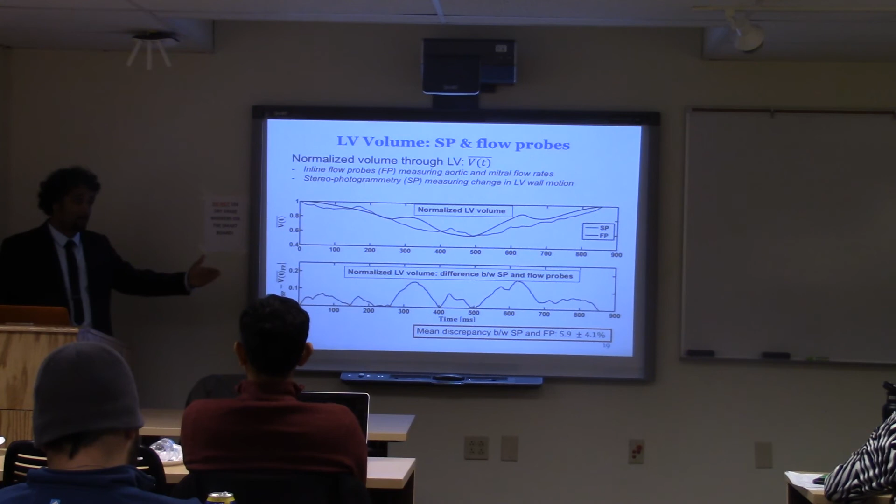The next thing we did was look at the volume from MRI and compare it with the stereophotogrammetry, and then calculated the normalized volume. It was actually pretty good in terms of matching together, about 5.5% on average.

So what this tells us is, under this resolution of 128 phases a cycle with 6 millimeter thickness, 15 slices across the heart, the volume from MRI measurement is actually close to what two other methods with higher time resolution independently calculated. That's kind of a very new comparison. Nobody has done this in the left heart before.

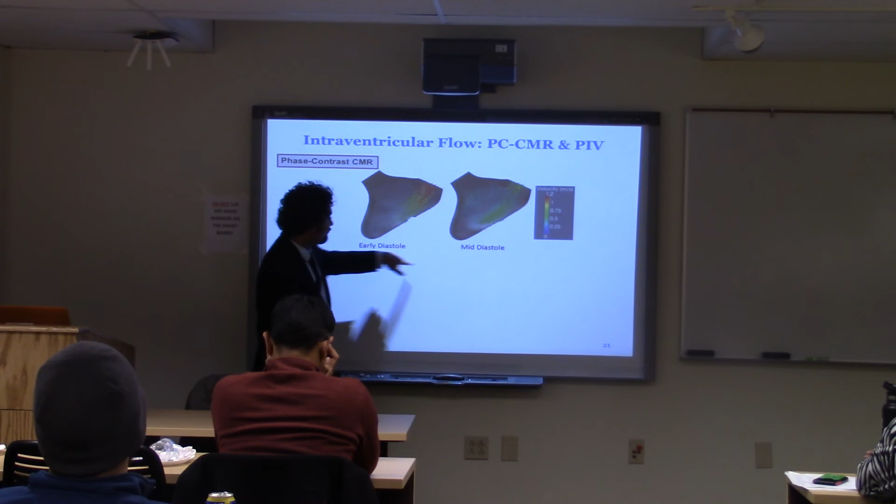In terms of MRI-based flow patterns, here's early filling, mid-filling. You see swirling of the flow around the heart model. With particle image velocimetry in the lab, we got qualitative agreement, and more or less the peak values are about the same. So there was wall motion, and this is the flow.

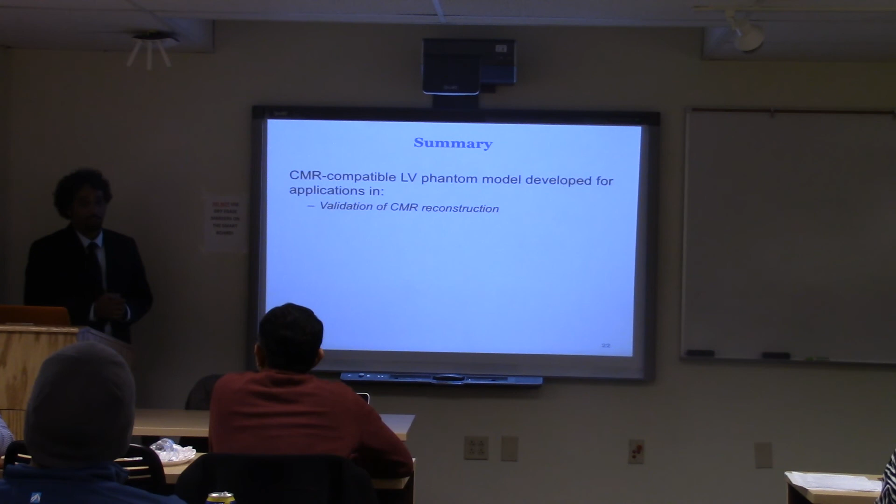So basically, where we wrap this up is that we were able to validate a particular method of CMR reconstruction in MATLAB. Now we can start asking questions like, hey, I have a Siemens scanner, I'm a cardiologist, and this is what my technicians use to reconstruct in the Siemens scanner. Is that good? I don't know, but I can tell you.

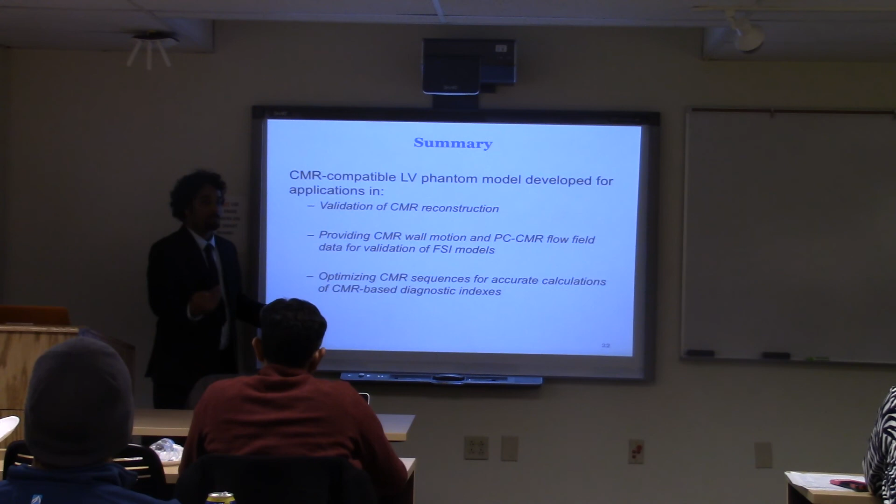The next thing is we're able to provide medical imaging, CMR-based wall motion and flow, for validation of computational models. This is a test facility for that. The hope is that we can start asking questions about how good the resolution needs to be for different metrics of pumping, of heart function. In other words, when can I say that an MRI scan at this resolution will give me something accurate?

So moving on, that was a facility and one particular example of an application. The next thing is more along the lines of...